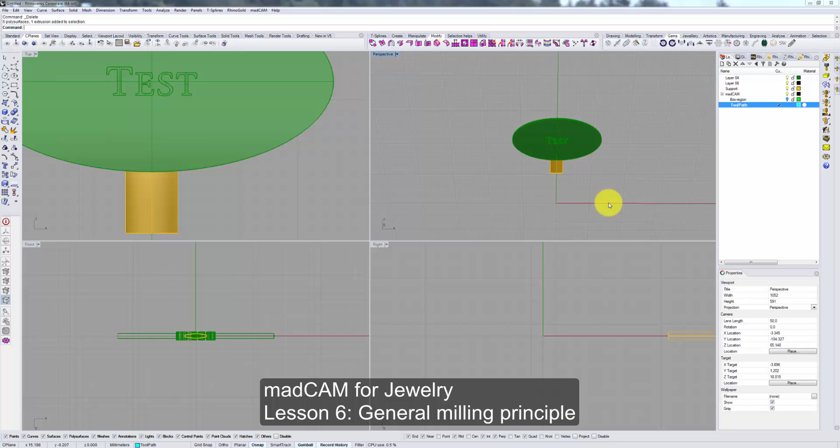In this video, we'll discuss some general milling principles as well as some madCAM specific issues and how to avoid them in following these principles. One of the most common questions I hear from new milling users is, how do you decide where to cut and in what sequence and order? And my effort in this video is to provide you with a general approach to milling and show you how to do this in madCAM.

So the principle is fairly straightforward. You cut from an area with the least amount of support, moving gradually towards an area with the most amount of support. What that means is you start at the end furthest away from your chuck or holder or support and move towards it so that one of your last operations is either finishing the support or cutting it off entirely. So let's look at the case of this medallion.

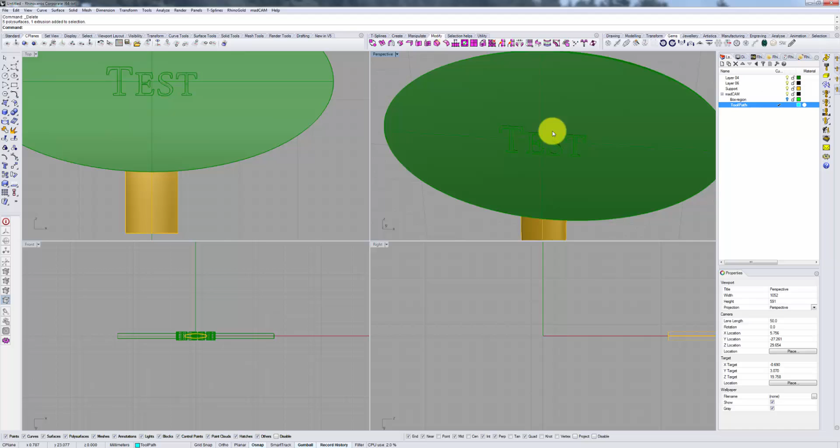We have a double-sided medallion as well as a little engraving here on the top. We have a support attached to the bottom. So according to our principles, we will prep our wax stock, so trim off the excess, then work on this top part before proceeding to the sides, and then finally the support itself. So let's begin.

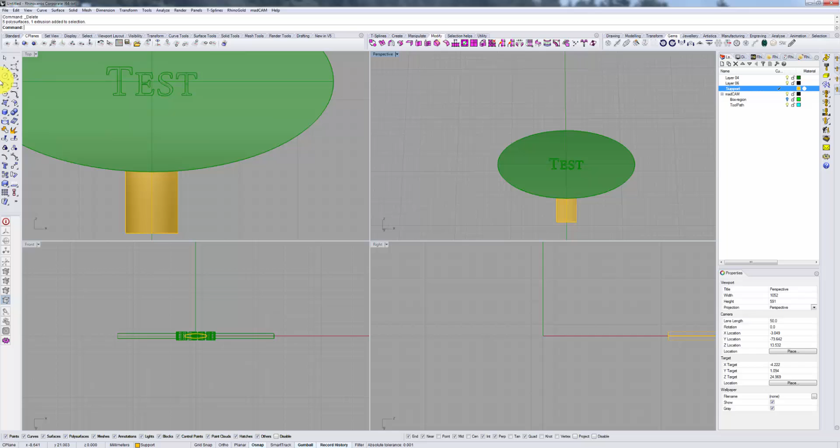We will, as before, create a general curve that will be used to just trim any potential issues with excess wax stock. Make sure to select your model as before, choose your tool bit, confirm that it looks correct in your simulator, and then in your 5-axis options make sure that your direction is set to from active C-plane.

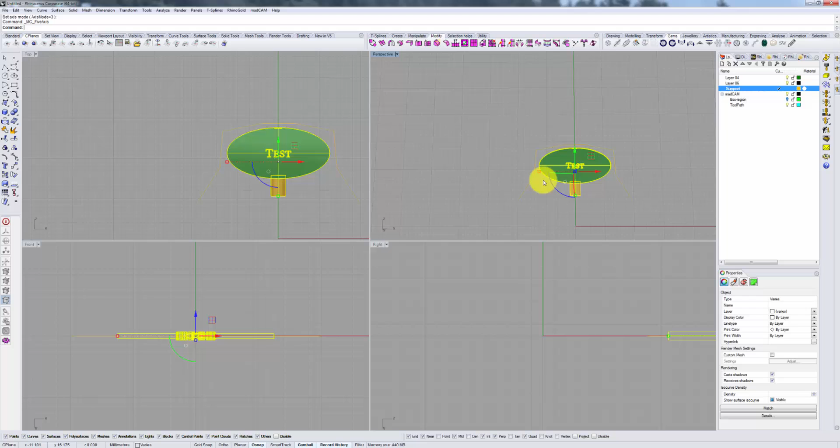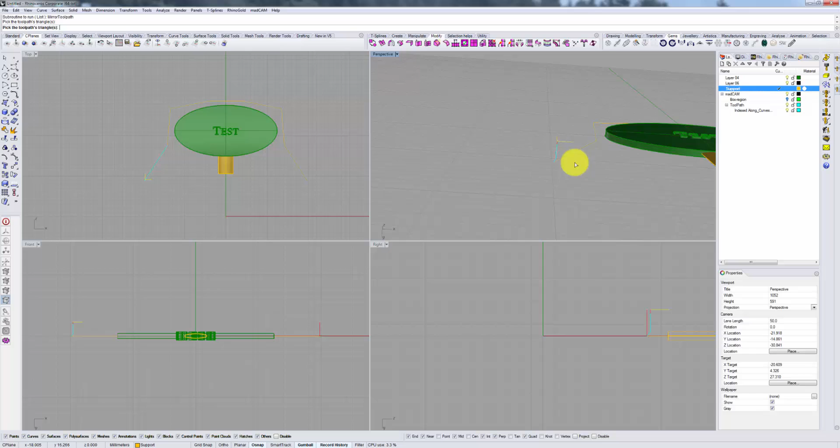Whatever you see in the top window is whatever you're going to be cutting. So this is the correct positioning for our top-down cut. We'll choose along curves and make that initial line cut. We will use that mirroring script that I've mentioned before, and that we'll discuss in greater detail in the next video. And we will mirror this toolpath across the axis. Now we have our stock trimming.

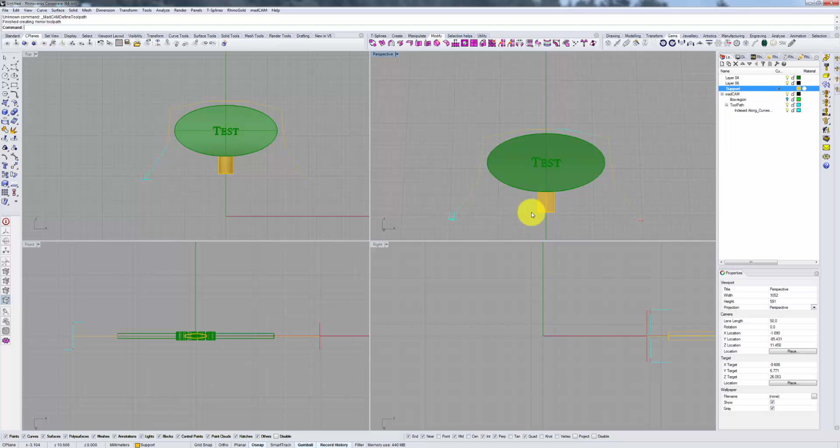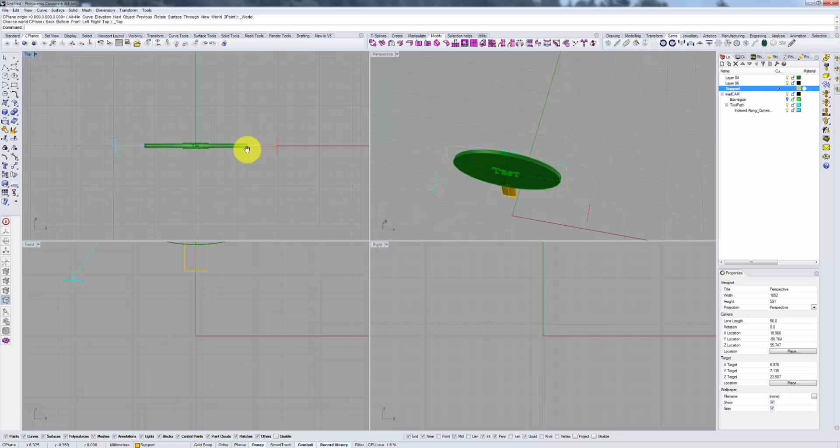For the purposes of brevity, I will not repeat this procedure on the other perspective. We'll just assume that this is done or your wax is thin enough to be able to handle it without. Now that our wax stock is trimmed, we can proceed to milling the top part. We'll do this by changing our C-plane perspective, and all of those commands can be found here. So go to the top-down view, and we should be able to see our engraving there. There it is.

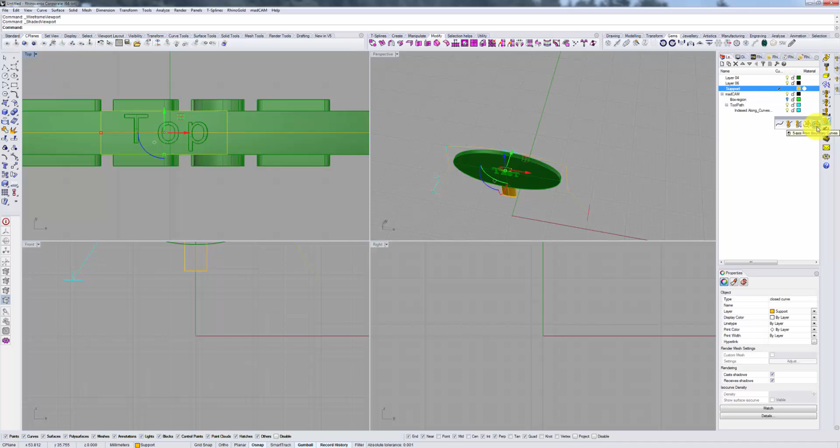And we will create a bounding curve in the form of a rectangle around this inscription. Here we will use a tool called toolpath from boundary curves, specifying a step over of your choice, let's say 0.04, and a link method of y. The reason for y is because this particular engraving is more vertically oriented rather than horizontally, so it will probably look a little bit cleaner if I do it this way.

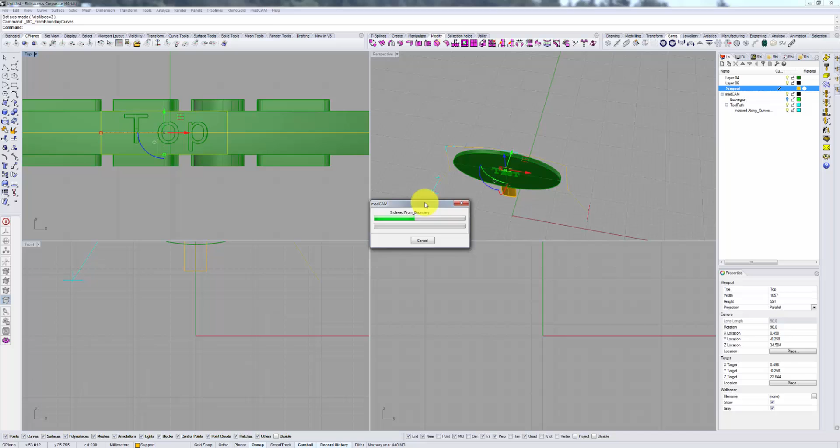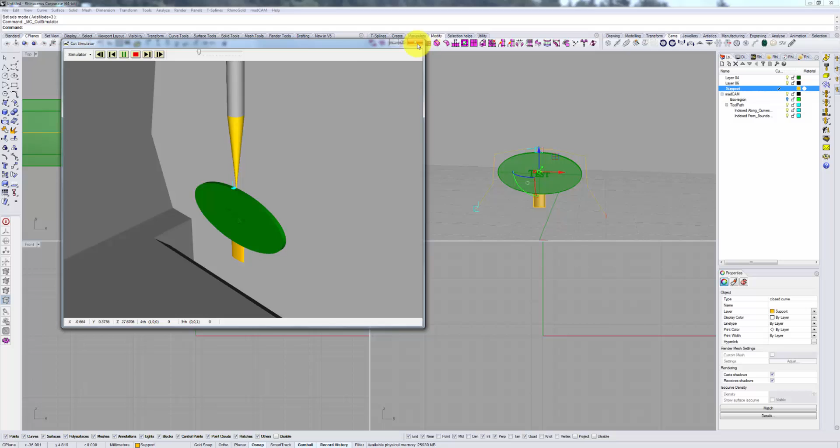So here we are, there's our toolpath for the top part, and we can preview both the wax trimming toolpath and this one in our simulator. So there's our initial cut, and there's our top cut. So that's good. Now we can proceed to cutting out the sides. So here and here.

So we change our C-plane perspective again. Make sure we're in the correct view. And once again, we need to create a boundary curve. So the way I usually do this is by creating a silhouette. You can ignore the invalid geometry warnings for now. And using a curve boolean command with delete all, clicking outside of the created silhouette.

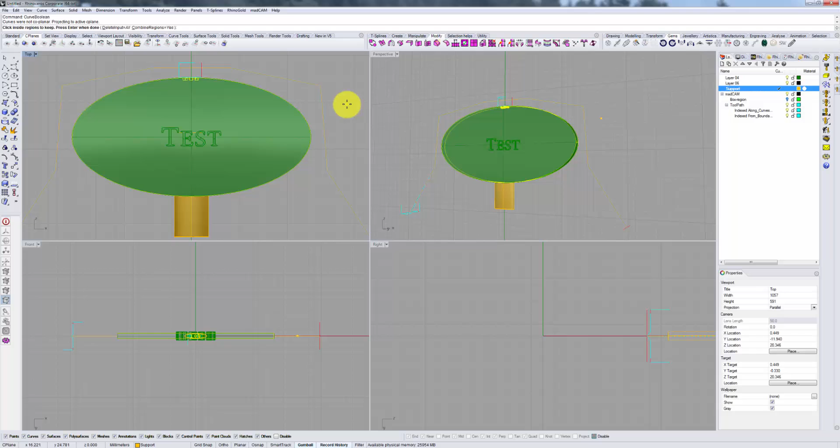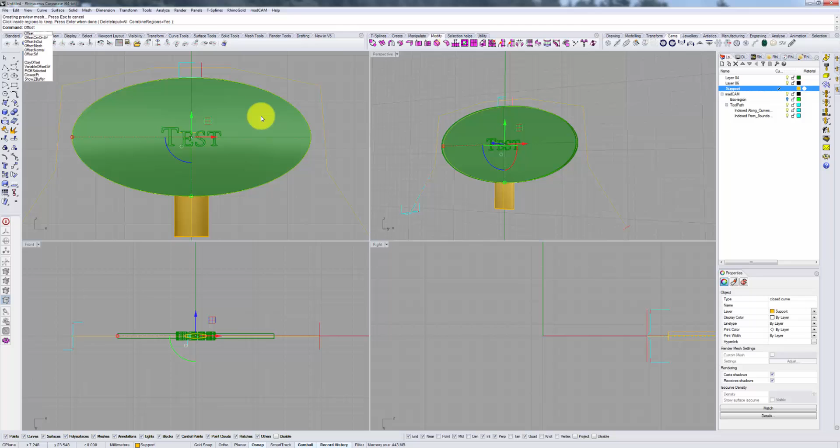Now, depending on the bit that you're using, you may need to change this curve a little bit. I'm using a tapered 5-degree bit, which means that there's an angle on each side of the bit of 5 degrees for a total of 10, 0.1 of a millimeter. So I'm in the habit of using the offset command with a distance of 0.1 and just clicking outside of the curve to go just a little bit beyond the boundary of the object itself.

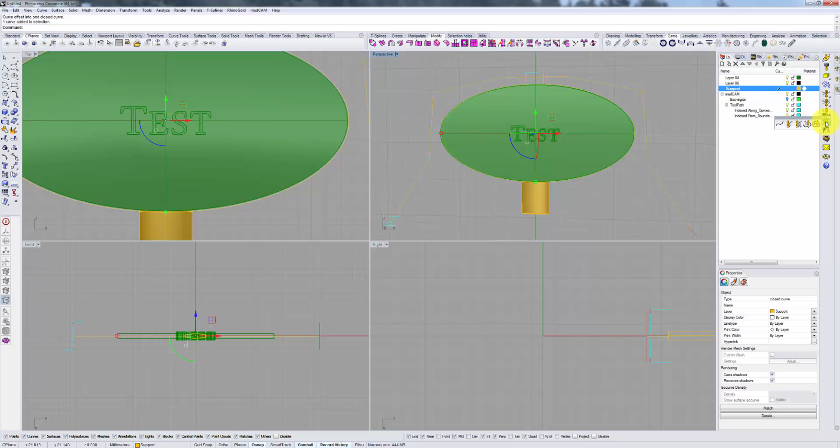What that does is it assures me that it will also cut some of the side in addition to just the surface, which will be useful to us because we want to make sure that these edges are also cleaned out. So we'll go to our boundary curve milling. We set our link method to x, specify a step over size, and let madCAM calculate the toolpath. And depending on your step over size, depending on your tolerances, this may take either less or more time.

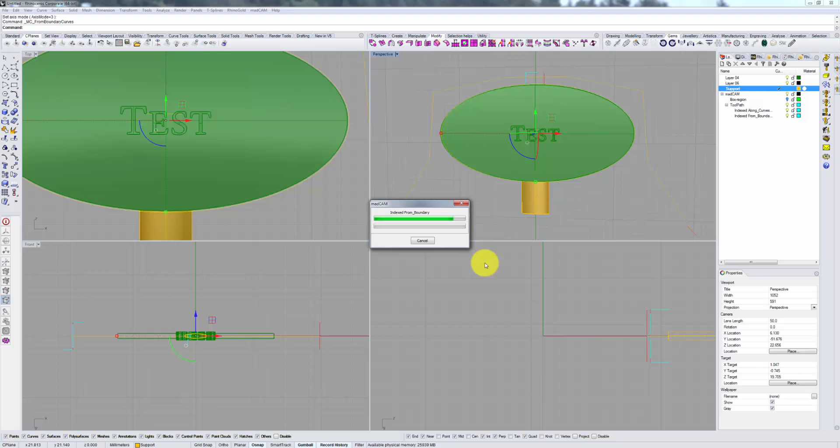Incidentally, the longer the toolpath calculation, the longer most likely your milling time because of the fineness of the step. In this case, this doesn't take too long, and we can see our blue covered surface here. As well, if you observe these lines kind of waterfalling a little bit down and just slightly below the middle of this object. If we kept the original line, which was right on the boundary of the object, they would stop right about here, and we would not have cleaned out the side.

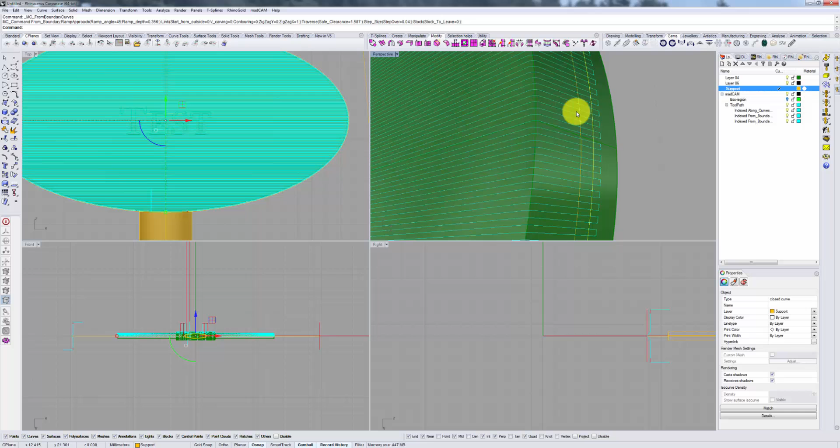So on the first glance this looks good until we zoom out and notice that our starting triangle, this right angle thing that specifies where our bit enters, is at the bottom. So it will start here, moving sideways, and end up here, which is in violation of our milling principle of going from the area with most support to the least support.

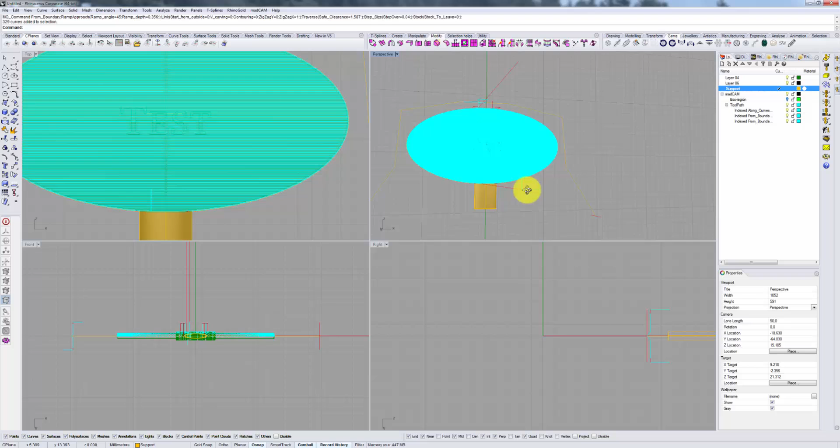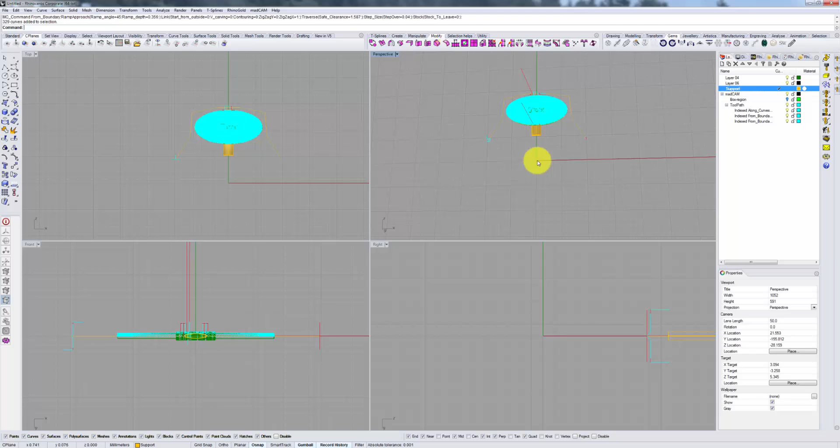So this is because madCAM does not respect curve seams or anything of that sort. It simply goes from the lowest possible number on the axis of choice, so in this case, for example, our z-axis, to the highest number. So if this is our 0, it always calculates toolpath from here upwards. So this doesn't really work for us, so we have to create a little workaround.

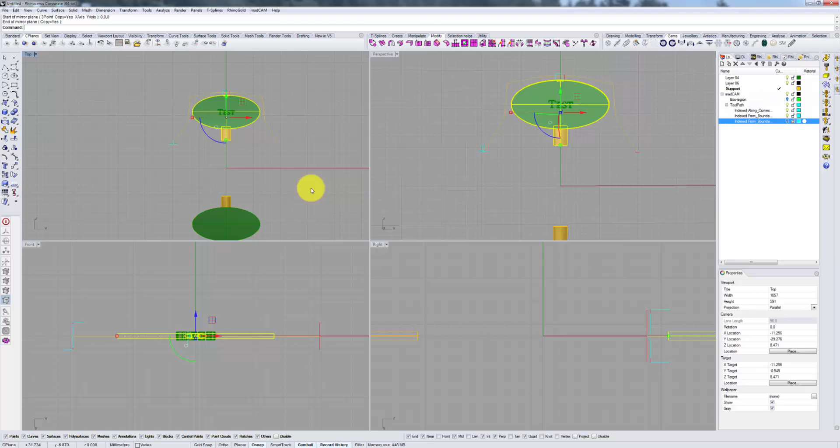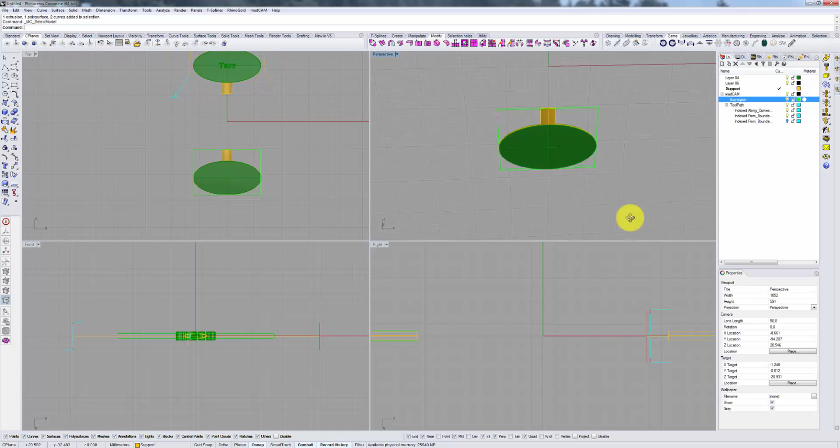The way we do that is by selecting our model and using our Rhino mirror command to mirror it about the 0 point. The whole thing gets reflected here, and we can select this new reflected model, and you can show your box region here to make sure that it's the correctly selected one. And now we see that our reflection is selected, and we can repeat our toolpath calculation.

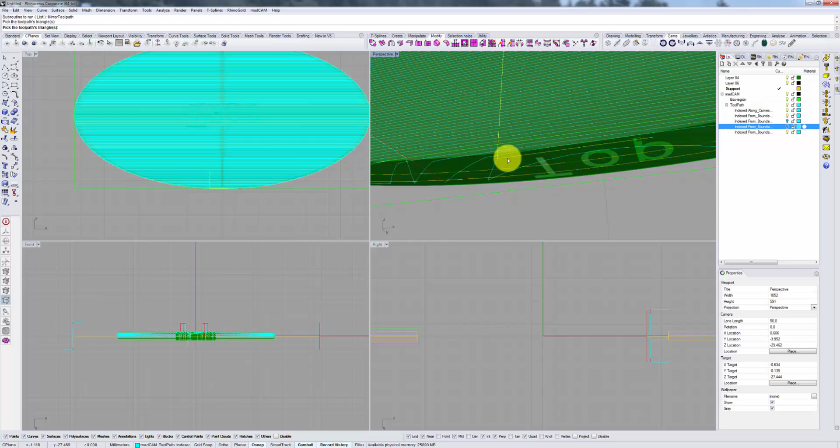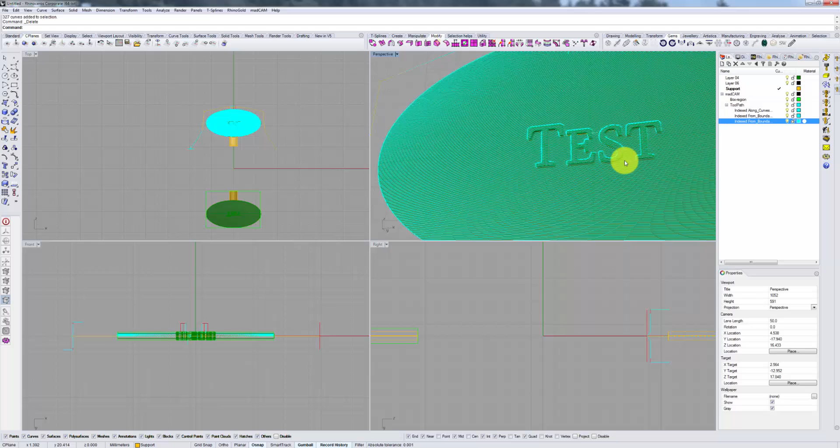Same settings as before. Now you will see that our toolpath is calculated correctly with our starting point closest to the top. So to get our toolpath back to the correct position, we'll use our mirroring script and reflect it back about 0 while deleting the original toolpath. So we can delete our previous attempts and navigate back to our original model, and you can see that it's overlaid as we expected.

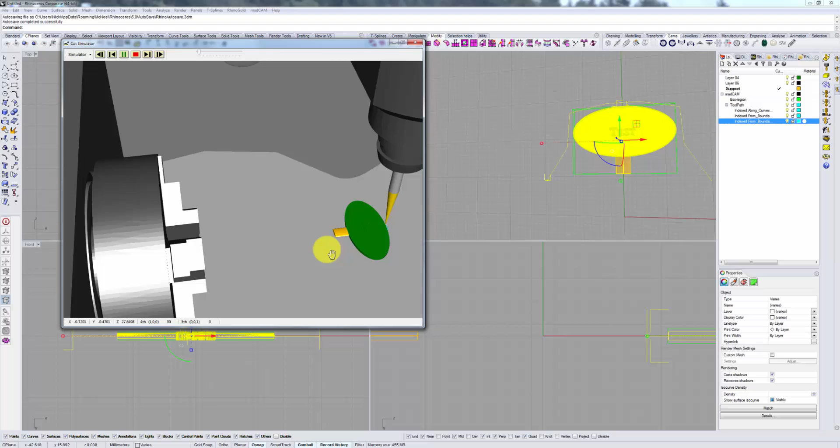We can reselect our original model and run the preview, watching that to confirm that it did what we expected, and you will see that yes, indeed, it begins at the farthest side and continues onwards towards our support.

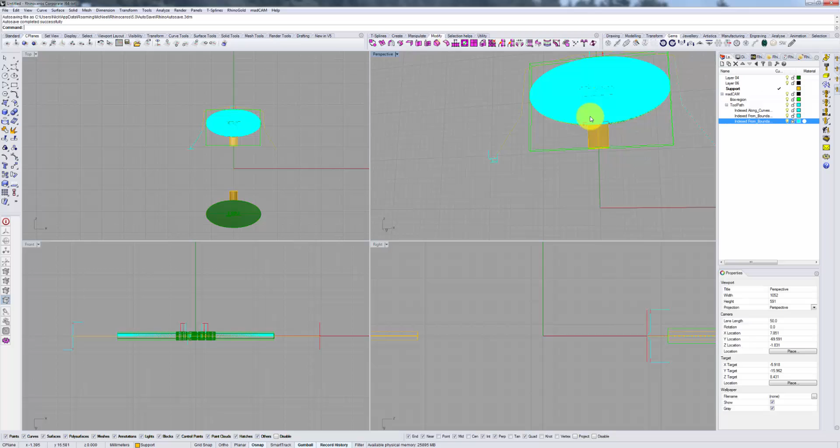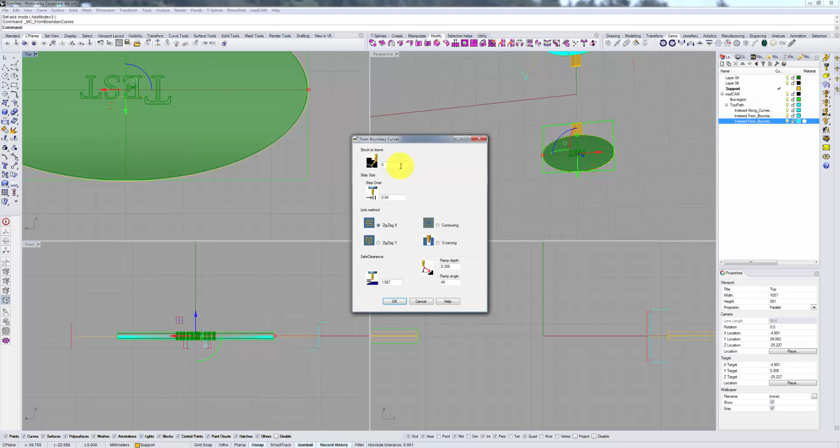We can perform the same operation for the back, and this will be done the same way, basically selecting the reflected model, then choosing the opposite C-plane now, so you can see that our text is sort of written backwards here, repeating the same steps over. Now our operation for this other side has been finished.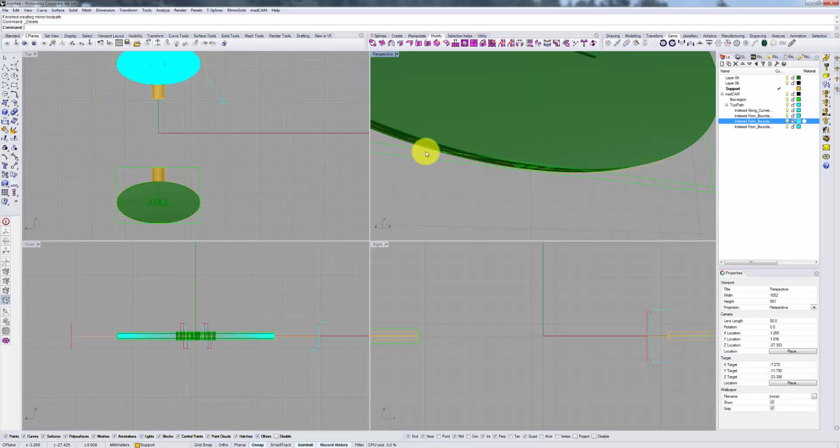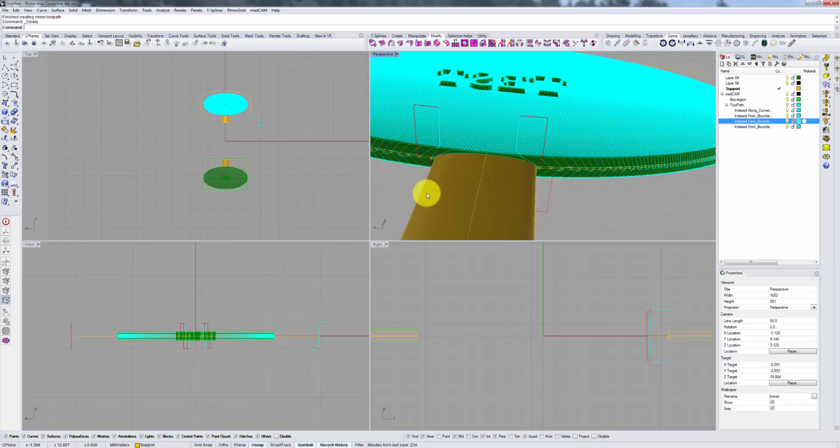Let's mirror it back. Oops. Make sure I select the correct thing here. Delete the original toolpath. And now we have both the front and the back sides of this medallion correctly calculated and toolpathed. Now all that remains is to do this last segment of the support itself.

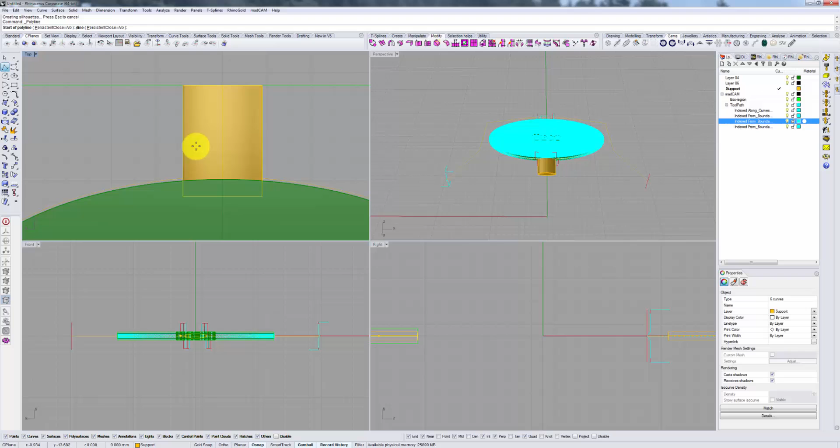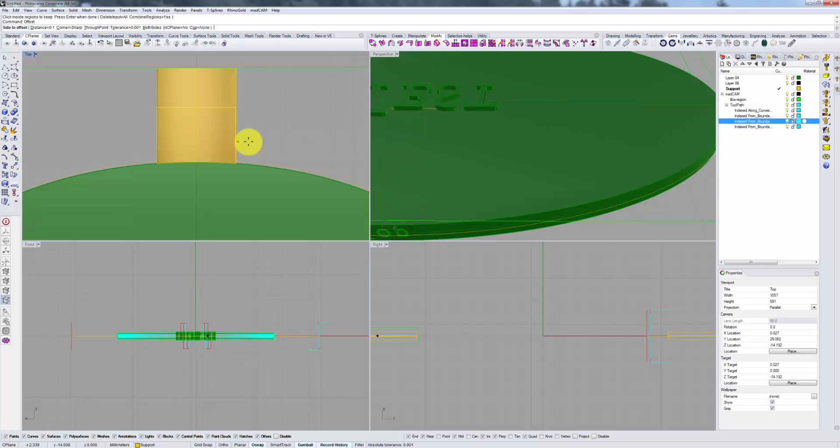So while we have our selection on this reflected object, we can create a silhouette of this. We can trim it down a little bit because we might not even need this entire object, and create a curve from all of these curves put together. So here's what I was looking for. There. So as before, we offset the curve by about 0.10 millimeter if you're using a 0.5 millimeter tool bit, and we perform our calculation. Because our support is symmetric, there are no differences between top and bottom.

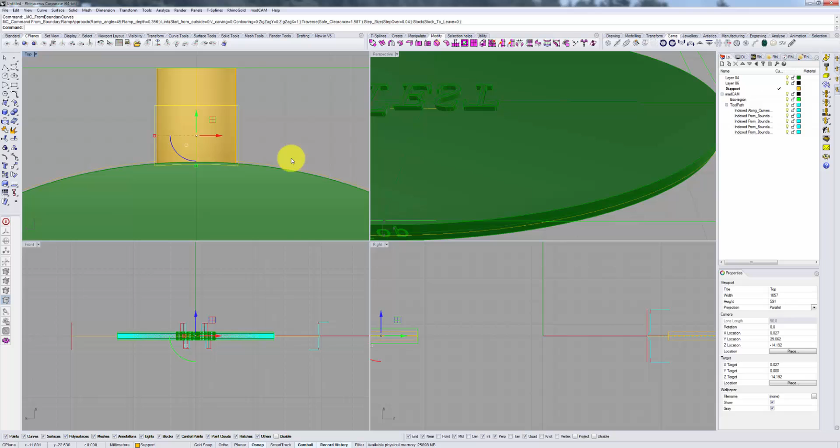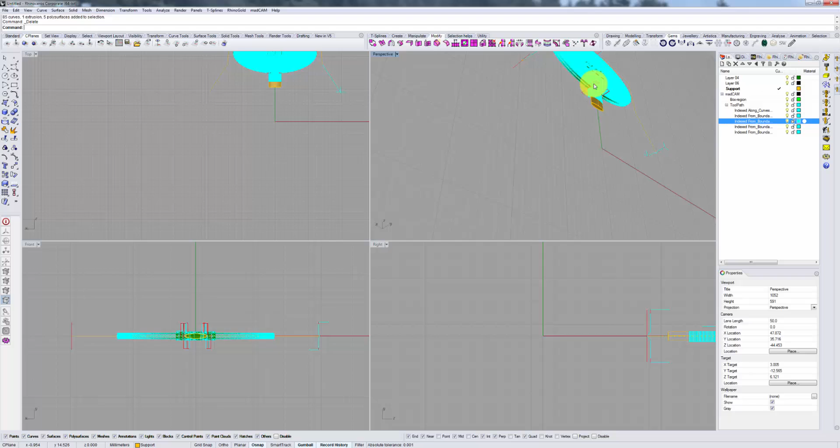We can just do one side and use it for both. So let's reflect it back on our original model. We can now scrap this entire thing since we're done with it, and let us mirror it one more time, but this time around the z-axis. So this is our last operation.

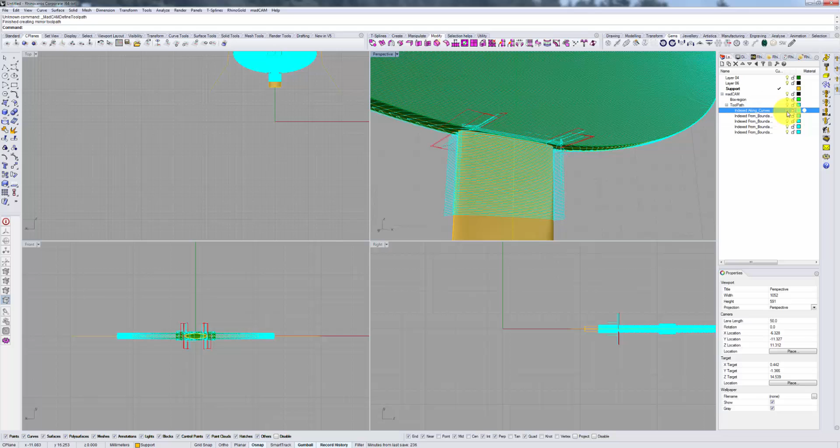Let's re-enable all of these and watch the simulation. We do our initial cut. We do the top engraving. We do one side, moving from the furthest point to the closest point. We do the next side, going from the furthest point to the closest point. And then we cut out the support once again, moving in the furthest to closest direction.

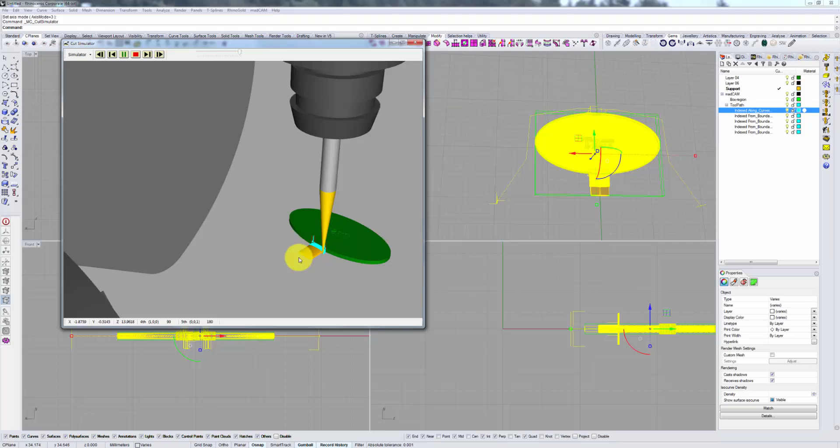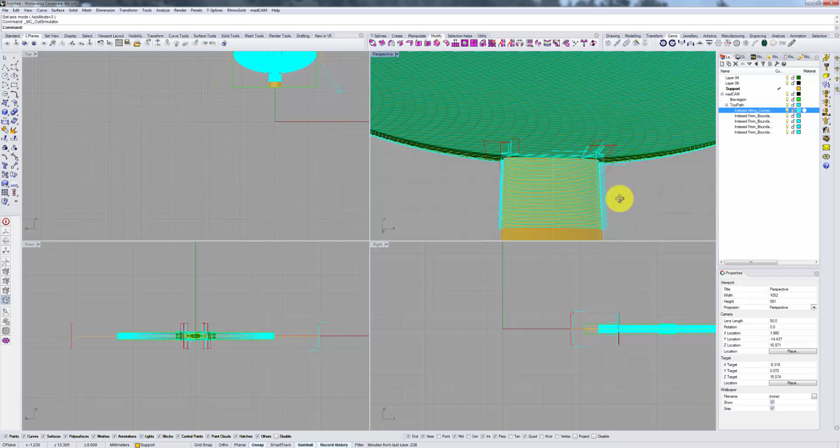At this stage, your model is done according to the principle that I've discussed, and even though the model itself is larger than the support, it will hang on just fine by this little thing. You could add an extra operation, a simple line to cut this across, or you could do this by hand. That's entirely up to you.